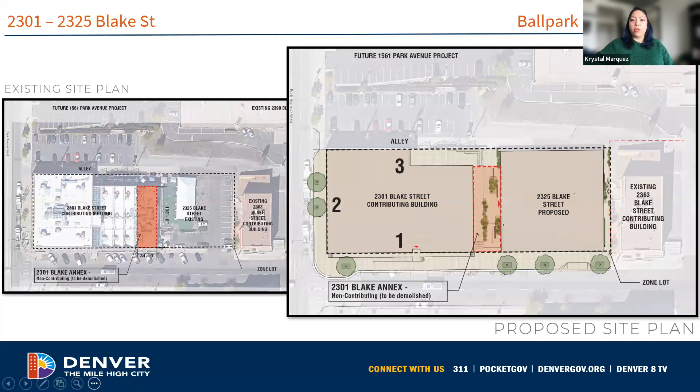2301 Blake Street is a contributing structure to the district. However, the proposed demolition of the later 1950 addition, outlined in red on the left at the parking lot area, is shown as non-contributing in the district map. So staff is supportive of the partial demolition of the non-contributing portion of the structure. On the right, you can see the new proposed site for 2325 Blake Street, where the arcade area will be cantilevered over the demolition area, and you can also see the footprint for 2325 Blake Street.

Here you can see the existing front facade for 2301 Blake Street with that later 1950 addition proposed for demolition on the right. On the bottom is the proposed elevation of 2301 Blake Street if the demolition of that addition is approved. The applicant has stated they plan to restore the newly exposed portion of the wall to the original as closely as possible, and that much of the interior wall remains, though no photos have been provided showing the current configuration. The applicant stated more detail would be provided in phase 2, the design details.

The removal of the non-contributing addition is proposed to make way for the new arcade at 2325 Blake Street. The new arcade will provide access to the rear alley and 1561 Park Avenue West, a property also being developed adjacent to the rear alley. However, that will be located outside the Ballpark Neighborhood Historic District boundaries, so we won't be seeing that, and no other demolition is proposed for 2301 Blake Street.

Here's the ground plan comparison for 2325 Blake Street. The new infill structure will align closely with the primary structure at the facade along Blake Street. The simple building form and massing is characteristic of the district. However, the overall height is not characteristic of the block. The new infill structure will be located between the primary structure at 30 feet tall and 2363 Blake Street, listed at 33 feet 6 inches tall.

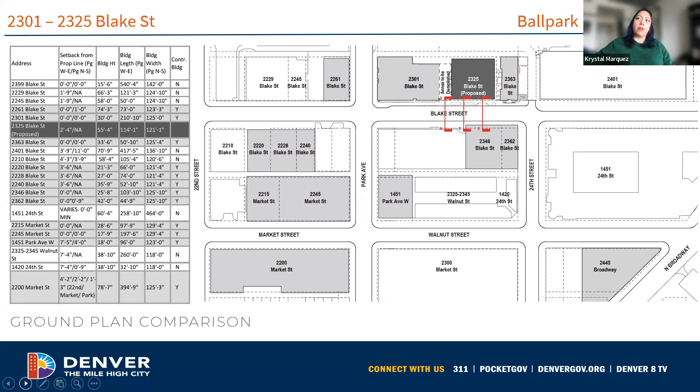The applicant has included heights of historic buildings in the surrounding context, such as 2261 Blake Street at 74 feet 3 inches tall, and 2362 Blake Street at 42 feet tall. Although these buildings are not located on the same block as the proposed structure, they are found within the adjacent context, and the proposed new infill structure would be between these heights, so it does appear height-wise contextual to the district.

Here you can see a street section at the arcade on the left, as well as the proposed first floor plan for the new structure at 2325 Blake Street. The main building entry is located at the interior part of the arcade, as seen on the right, and the height of the arcade shown is 25 feet tall, which does not seem to create an inviting pedestrian streetscape at Blake Street, due to the large height.

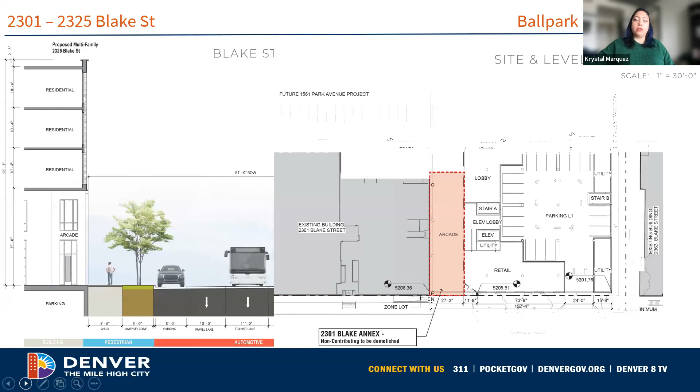The new infill structure utilizes the arcade for its main entrance, which is not typical of other structures in the surrounding context. There is no entrance directly into the new structure from the street, which is not typical of the district, as most other historic structures in the district have entries directly onto the street.

As you can see here, the primary structure appears like two joined buildings, since the second part of the structure is a later 1919 addition.

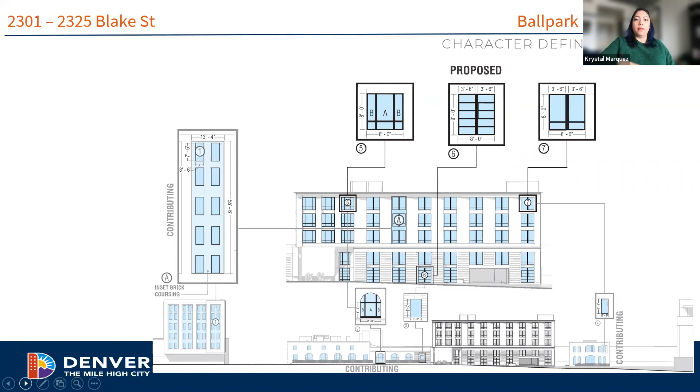The windows do not appear to be proportioned in size to human scale at the Blake Street facade. For instance, the windows at the base are taller and wider, 9 feet by 8 feet, than windows on the contributing structure, which is 8 feet by 5 feet. And the second floor windows on that first floor appear almost as 2-story windows, because they just have a trim piece between the first and second floor, so they appear much larger than they actually are.

Here's the Blake Street elevation for 2325. The new infill structure will include some typical features and rhythms found on historic structures within the district, like a base, middle, and top. The new infill structure uses contemporary vertically oriented window patterns that do not incorporate window openings at similar proportions to what's found in the historic district or on the contributing adjacent structure.

Some of the windows, particularly above the arcade on the front facade, do seem to take nods from the contributing structure, though the other windows on the facade do not appear to relate to other windows called out on that character defining features page.

The windows on the proposed infill structure emphasize a vertical nature with vertical mullions in 2 different patterns at the upper story, one pattern over the arcade area and another pattern over the rest of the structure.

Those upper story window patterns within the surrounding context typically have paired sash window patterns with some spacing between the paired windows. This can be found at 2261, 2363, and 2362 Blake Street. The upper story window patterns found on this proposed structure do not really match those patterns, and the upper story windows appear as one window rather than two paired windows, and are not a sash type of window, which would better match the historic character of the surrounding buildings.

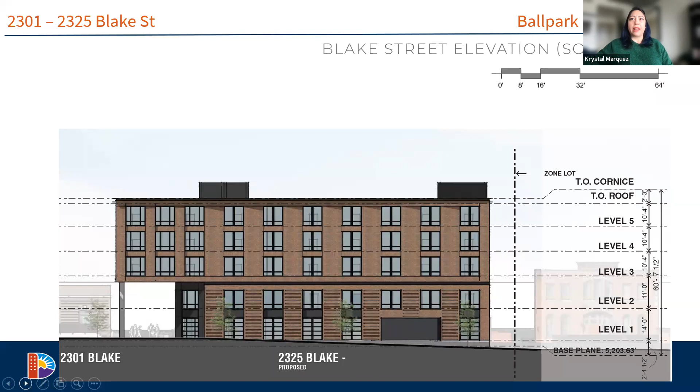The surface parking area in the building will also be accessed from the front facade on Blake Street as seen here, instead of on an alley. Access to the parking area should be moved to the rear of the building and be accessed from the alley, which would follow district patterns better.

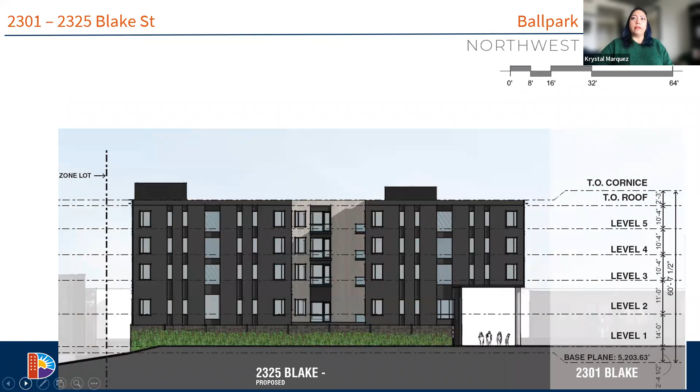Here you can see the rear elevation along the alley. The windows at the rear and side facades do not really appear to have any relation to the historic context, as they are very different from the front facade, and there are several different window styles. However, being at the side and rear elevations, there may be more flexibility for these windows.

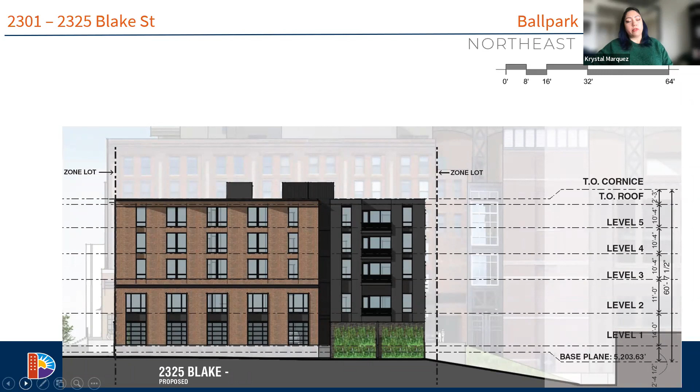2301 and 2325 Blake Street are located in the factory warehouse sub-area, according to the designation application for the Ballpark Historic District. Buildings are more horizontal in form, multi-storied, flat-roofed, completely cover the lot, and have a structural system of bays articulated on the facade using details such as pilasters, columns, and decorative brickwork. So staff has some concerns with how the new proposed infill relates to other contributing structures in the district, particularly in terms of window patterning and placement, as well as the verticality of the facade design and bay articulation. Therefore, staff is recommending denial at this time.

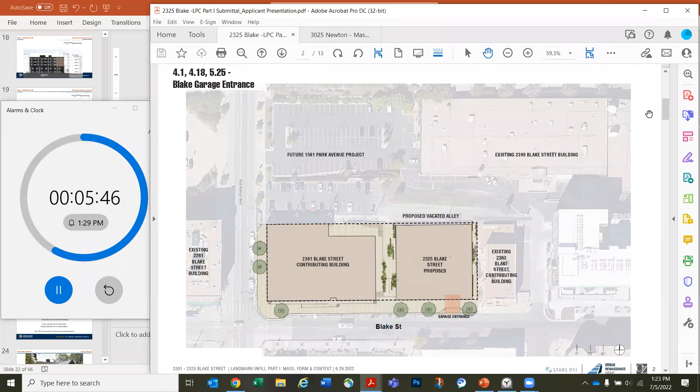There were a couple of staff comments on the position of the building in relation to the property line. We're proposing to hold it back just about 3 feet to allow a little more cushion to what will be a very, very tight pedestrian realm and right-of-way as a result of the proposed flow line from transportation. Right now it's kind of a no man's land with no curb, and this allows for a pedestrian realm. We thought that if we could back off about 3 feet, we could get a little more active space, and also outswinging doors that could potentially feed the retail along the frontage, which was mentioned. Wanted to point that out in this slide.

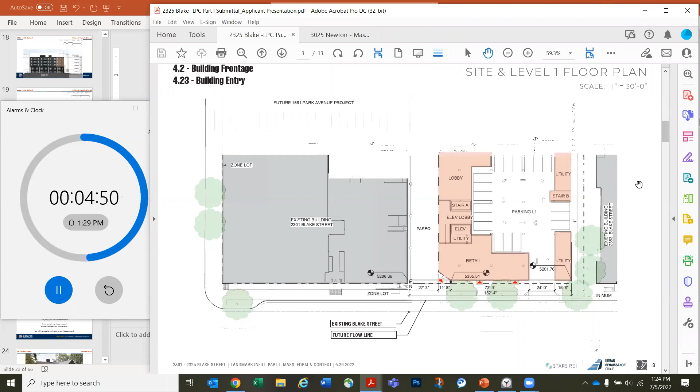If you go to the next one, thank you. This is just for reference, the frontage and the entry. We are proposing a chamfered entry, which you can see in and around the neighborhood, to highlight this pedestrian flow, this paseo or passageway, that would take us into this very vital and revitalized pedestrian vacated alley that will really be the nexus for the entire development.

Next, thank you. Here again were a number of precedents of that kind of chamfered corner treatment. These next few slides we'll go through quickly to clarify the height and how we're measuring it, which is now consistent at 58'3". As staff has mentioned, it does seem to be consistent with the heights in the district.

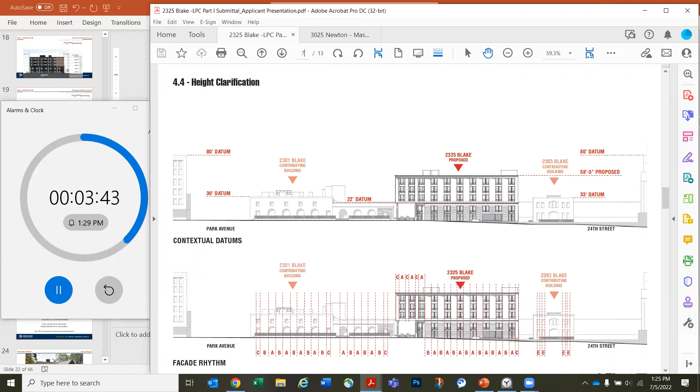Next, and these next few just use that 58'3" consistently. We were measuring it a couple different ways, and it's now consistently measured. These are just going around the whole building with that consistent 58'3".

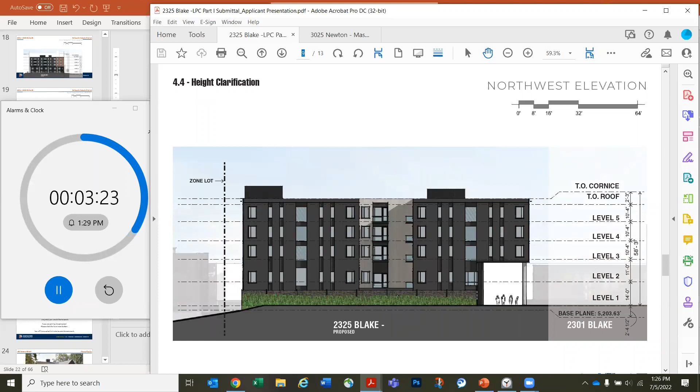Okay, and now this one — again, we really appreciate the feedback. This is more of a clarification, and we look forward to refining these based on the feedback as we come out of the mass, form and scale phase 1 and go into more of the detailed design. Not to say that doesn't matter, and right now again we appreciate the feedback.

Wanted to point out that the ground floor is where we're proposing a mullion pattern more consistent with the pedestrian scale, and also a nice water coursing taken off of the 2301 building that we're continuing across. So it's that horizontality that's intended to enhance the pedestrian scale.

Okay, and then you can see this — oh, I should be doing this. Sorry, I'm going to annotate just a second. I don't think it's allowing me to annotate. Anyway, you can see that horizontal striping of the existing historic building and how we're picking up from that and continuing it on the facade and the window mullions down low.

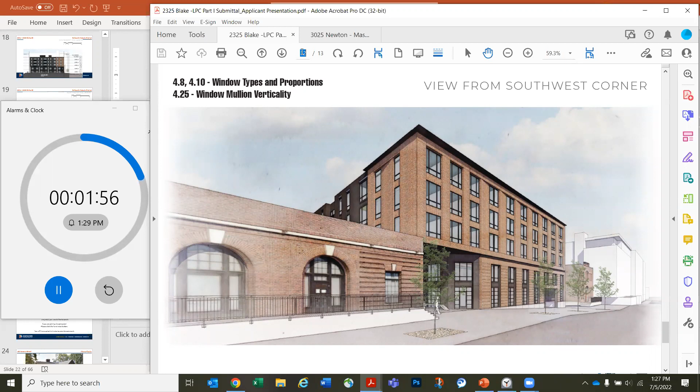This was just to clarify — even though staff has said our building width is consistent within the district, here we want to emphasize that we believe that's our opinion as well. Here are 3 local cases where it is rather consistent with the width of the buildings in the district. I think that concludes it, if you go one more.

So again, eager for your feedback and any questions. Thank you. Thank you, Rick.

Thank you, Pat. Commissioners, have you any questions for our applicants after their presentation? Okay, it doesn't look like it. We have no comments — you did such a great job that they don't have any questions for you.

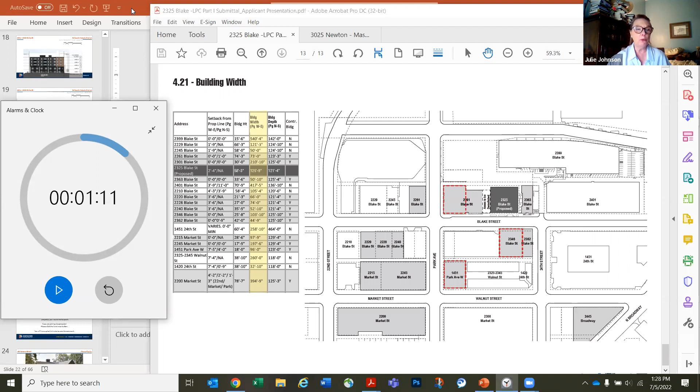Thanks, Rick. Thanks, Pat. So we will now, commissioners, do you have any questions before we go into deliberation? Have you any questions for the applicant? Oh no, we need to do public comment. Yep, sorry, I got ahead of myself.

Sorry, guys. Are there any people from the public that wish to make a comment, Jen? I don't see any hands raised, but if you would like to make any comment, please use the hand raise button at the bottom of your screen. I don't see anyone on the phone. Nobody on the phone, okay. No hands raised at the moment.

Okay, since there aren't any public comments, commissioners, have you any questions for the staff before we head into deliberation?

It does not look like it. Krystal, did you have any redirect, any further comment? Nope, I'm good. Great, thank you very much, Krystal.

Great job. Alright, commissioners, let's go into deliberation at this point now. What are you thinking? What are some of your initial thoughts? And keeping the guidelines in mind.

I think Krystal hit it very well as far as this proposed structure and its relation to the guidelines. What strikes me most of all is the garage entrance, because if you've ever tried to cross in front of one of those, you've got a pedestrian and safety issue. So they're widening the space to make it more pedestrian friendly, I think. And then you're going to have cars coming and going in and out of that spot. That's an accident waiting to happen, in my opinion.

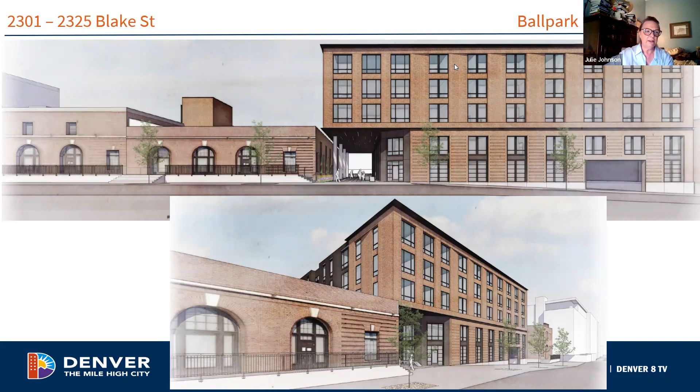George? Aye. Gary? Aye. Larry? Aye. Ann? Aye. And Julie also votes aye. So the motion passes, the project is denied, the application is denied.

Sorry about that. We are moving on to our next project for design review. It's 185 Corona Street, Alamo Placita. And it's Jessi. All right, so this is Jessi.

This is 185 Corona Street, constructed in 1945. This is a contributing building to the Alamo Placita Historic District. I would point out that the period of significance for this historic district is 1889 to 1942, so this by date of construction falls outside of that period of significance. But the designation for this historic district calls this building out specifically as a contributing structure, even though it is outside of that period of significance. So I did want to make that very clear at the beginning of this presentation.

So the applicant is requesting, additionally on this property, there is an addition off the back of the building that doesn't show up until the 1961 Sanborn map. The applicant is requesting to do window replacement of both historic and non-historic windows on the structure. Some of those windows are in that addition that I just pointed out.

There it goes. My mouse is being touchy today, so apologies in advance.

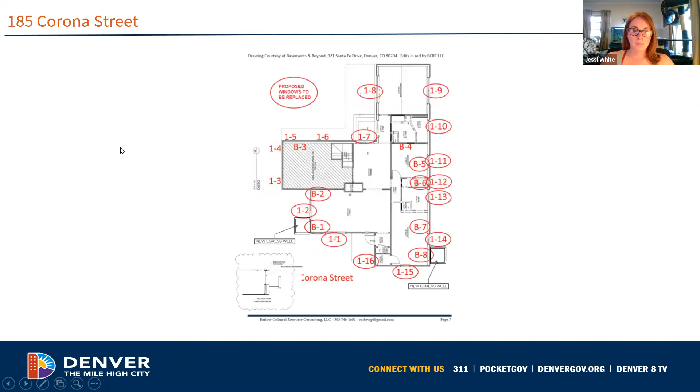Ten of the windows on that house are historic windows being requested for replacement, two of which are historic glass block windows. That's window 1-12 and window 1-16.

The applicant had the windows assessed by a window professional. The window conditions matrix shows several of the operator handles and movement mechanisms as a 3, meaning advanced deterioration. Staff wanted to reach out to that window assessor to get more information on that deterioration level.

The assessor stated that all the historic windows exhibit conditions typical of steel casement windows of this era, including failing glazing putty, failing exterior sealants, operational issues associated with overpainting and caulking and sealing, and broken crank hardware. He assured staff these are all in repairable, easily repairable condition. The crank mechanisms being the major reason for that 3 category can be easily replaced.

Of the 8 non-historic windows proposed for replacement, 3 are in the 1961 rear addition and 4 are at the basement level. Here are images of all of those windows, which are called out specifically in the window assessment as non-historic.

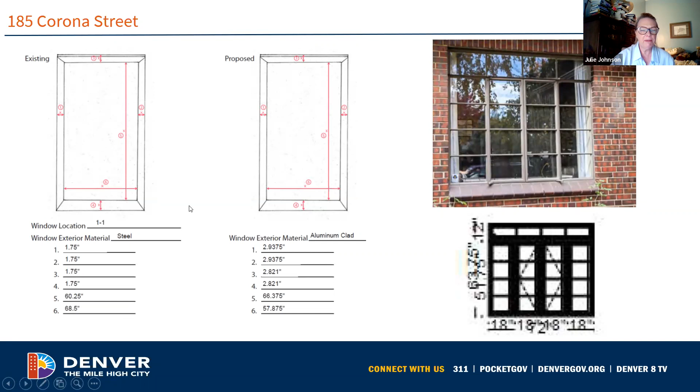All righty, can we get the applicants to join our group? Hi, it looks like we've got an applicant. The applicant's here, but it looks like you're muted. Hello, can you hear us? Yes, we can hear you now.

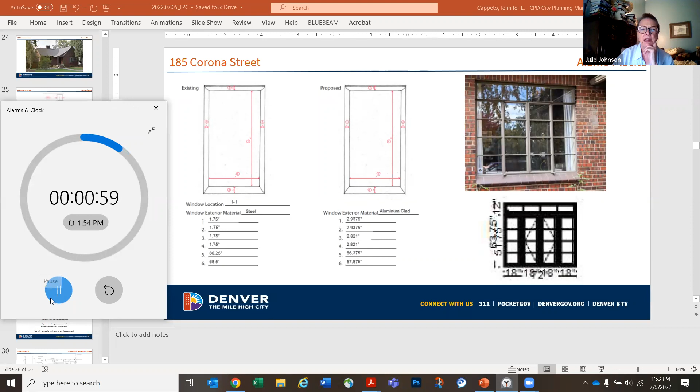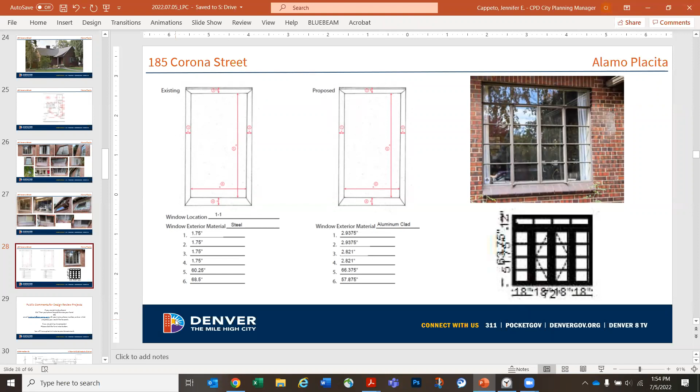If that's all from the applicants, commissioners, do you have any questions? Gary: This might sound like an impertinent question, but what is the heating system in this house? Is it hot water or steam, or is it forced air? Zeb, did you want to answer that? Forced air. Okay, thank you.

Any other questions, commissioners? It doesn't look like it. Thank you very much, applicants. Jen, are there any public comments if there are any? Is there anybody that would like to make a public comment? Please let us know now, use the hand raise function. I don't see anyone with their hands raised. There's one person on the phone. If you are joining by phone, press star nine on your phone. And they have not done so. Okay, great.

Commissioners, do you have any questions for Jessi before we go into deliberation? Anne: I have a question. This is, as I understand it, a contributing house, is that correct? Correct. And for this, though it's not in our purview, are tax credits available for the repair of the windows? Correct.

Thank you. I was going to follow up with a quick rebuttal. I really appreciate, Casey, you watching the video on my presentation for historic window repair. I would highly recommend repair rather than replacement. A lot of times whenever these windows are properly repaired and maintained over time, that will increase energy efficiency. You can replace defunct or dysfunctional single pane glazing. I know you'd have to put single pane glazing back in these openings as it is a steel casement window, but the repair of the windows alone will greatly improve your energy efficiency and sound efficiency, as well as having modern interior or exterior storms for these windows would help increase the energy efficiency and soundproofing even more while maintaining the historic windows.

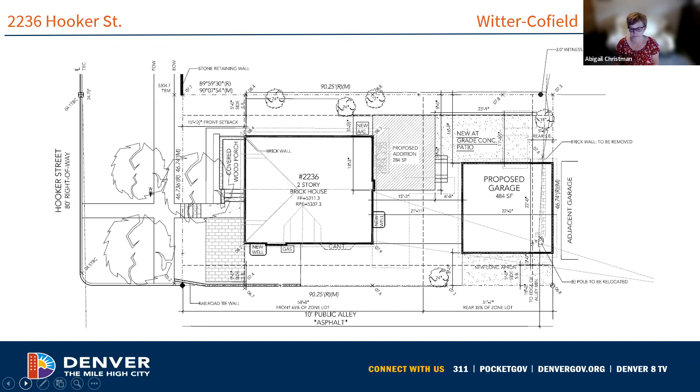So the addition will feature a simple front gable roof and will be clad in horizontal siding with shingles at the gable ends to tie into the shingles found on the historic residence.

So staff's only concern really with the design of the addition is this window that you see here facing the street. There are no other windows with the same proposed multi-light configuration on this addition. There aren't any other multi-light windows like this on the house. So we don't find the use of a multi-light window here to be appropriate.

We generally ask also that additions be simplified, so adding something that's more complex than any of the windows found in the house does not appear to meet the guidelines. So staff would recommend that instead this window be replaced with a simple 1/1 sash window that would fit better with the other windows on the house and be simpler for use on the addition.

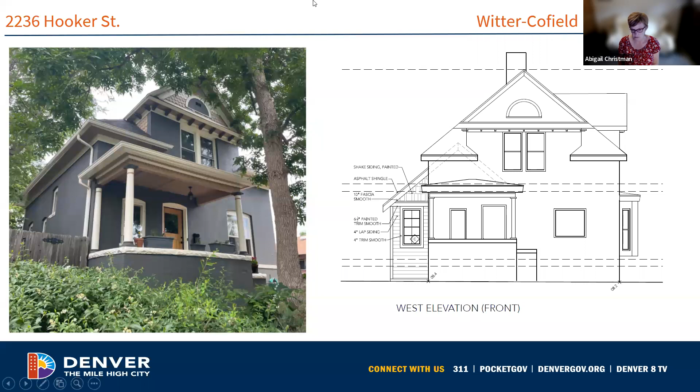The openings on this side elevation do have some public visibility from the sidewalk. And the window to be enclosed does feature a rusticated stone sill and a brick arch. Staff finds that that window does contribute to the historic character of the house.

Staff are concerned with the cumulative impact of the multiple alterations occurring on this elevation, with both the infill of the door and the infill of the window, and then the new window. So staff would recommend reducing the changes here, maybe just infilling the door but keeping the window, and adjusting that.

So staff would recommend that the proposed window infill and creation of a new window opening be removed from the proposal. This would be based on guideline 2.14, to maintain the pattern and proportion of historic window openings.

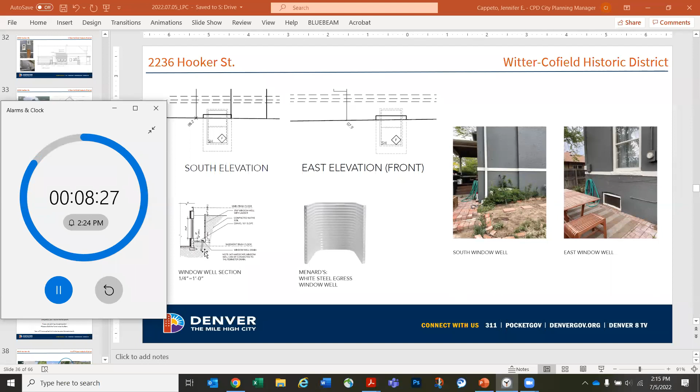The window wells, we will gladly switch these over to a concrete or brick base and change those details. The window on the north side facing the main street, we will gladly change this over as well to a 1/1 sash. I do have one comment, and I am not sure if it's something we can propose or not with the infill window. Is there any possibility, and you guys can tell me if this is a possibility or not right away, that the window that's being infilled can be infilled, but have the brick sill and arch over top convert over to the new window? The reason I say this is because in the plans, which were not shown on the presentation, the kitchen is behind that, and we would lose significant upper cabinet space if we have to keep this window as is. But we understand if this isn't a possibility, we can figure out how to make it work.

Nothing was really mentioned at all involving siding. We just want to reiterate that the lap siding is to mimic the brick. We are keeping with the fish scale on the gable roof, kept to the same design. We wanted to make sure the addition was also secondary to the house. With that, it's pretty simple for us. Abigail does a great job. Thank you.

Thank you very much. I do have just one question for you. Could you, the infill window, could you explain one more time what it is that you're asking? Yes, it crossed my mind when Abigail was going over hers when she was showing the picture of that side of the house. One down from the cursor.

On this elevation on the right here, the windows are fairly similar in size. If there's any possibility of using that brick sill or stone sill and the brick above from the infill to mimic it, where the proposed window is transferring just to the left. If this is a possibility for the committee to discuss, I'd love to hear thoughts on it, to be able to infill that and mimic it with that sill. I understand we'll still have to indent the brick if we infill, to recognize that there was a window there, but I'm curious about the possibility so we can have some cabinets on that wall on the inside. Okay, thank you for clarifying.

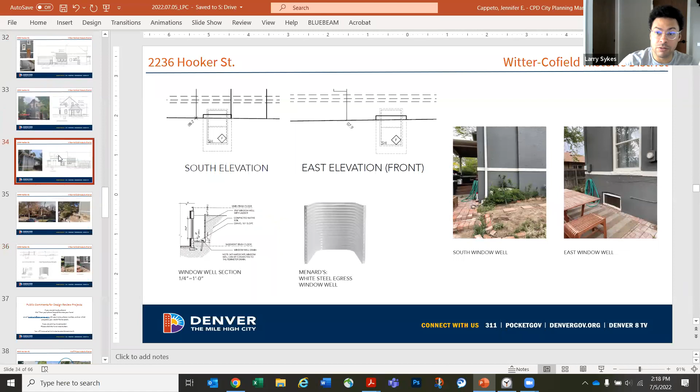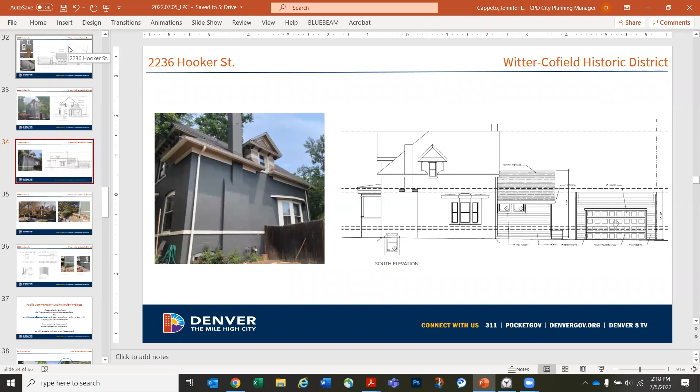Yes, could you retain the arches and still be able to meet egress requirements? Thank you, we will make sure to have that detail included in the conditional resubmittal to Abigail.

Thank you. Any other questions for the applicant? I'm not seeing any. Then we'll move on to find out if there are any public comments. If you're on the computer, use your hand raise function, let us know. I don't see any hands raised now. Okay great, thank you very much, Jen.

Commissioners, before we go into deliberation, do you have any other questions for Abigail? No? Okay great, thank you very much. Then let us go into deliberation, commissioners.

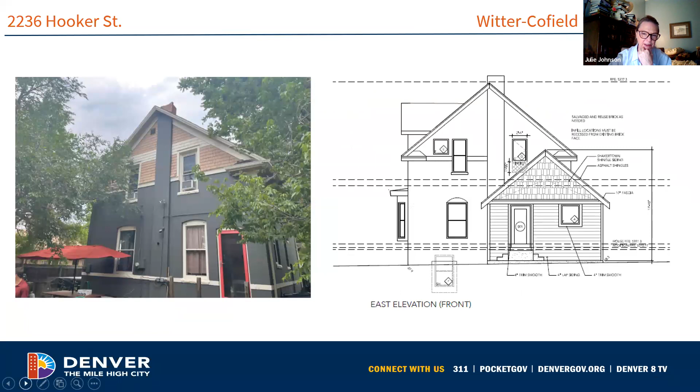What does everybody think? Maybe we could discuss the question he asked about the infill window he'd like to use, to move the sill and the stone. What's everybody thinking? I think kitchen cabinets are a quality of life issue. I would be fine if you want to move the window opening over and recognize on the exterior where the window had been.

Gary, I'd like to partially agree with what George is saying. I would agree with infilling the window, but leaving the existing original sill and head details there as historic evidence of the window. But to do that, I would oppose adding a new window. I think the new window is being added because there's a sink there. Well, the kitchen arrangement could be altered so the sink can go under the existing window further over. I know that might interfere with the perfect triangle, but I don't think that's too large a sacrifice to make in order to retain as much of the original exterior as possible.

What does everybody else think about that? Anne, I completely agree with Gary. Okay, short and sweet. I love it. Larry? Likewise.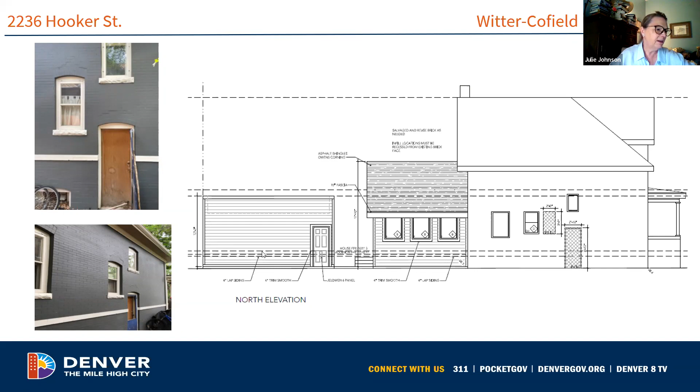Thank you very much to the applicant and to Abby. On to our next one, which is also in Witter-Cofield, 3025 Newton Street. And Abby is up again. Just as a heads up, it's not that there was a typo on the first agenda—it's actually in the Wolff Place Historic District.

Never mind, okay great, thank you for clarifying. Is it still Abby? Yes. Okay Abby, thank you. So up next is a mass form and context review for a new single family infill residence. The blue circle shows you the location—that's the house that will be replaced, and it shows the streetscape where it's going to fit into the block. The existing residence was previously approved by the commission for demolition based on approval of a replacement plan, so this is following that process as the next step to move forward. And that's the one you had approved based on changes that made it non-contributing, determined earlier. Okay.

I can get this—there we go. Okay, so here is the proposed infill. It's 2 stories plus a basement with a mostly rectangular form. The proposed infill draws inspiration from foursquare residences within the Wolff Place Historic District. Features drawn from the district's foursquare buildings include the hipped roof with deep overhanging eaves, the hipped dormer centered on the facade, the full width porch with a hipped roof on the facade, the boxy form, and the side chimney. The applicant has worked extensively with staff on the development of a compatible infill design for this lot, exploring several design options before deciding that a simplified version of a foursquare was the best fit for their needs, the site, and district compatibility.

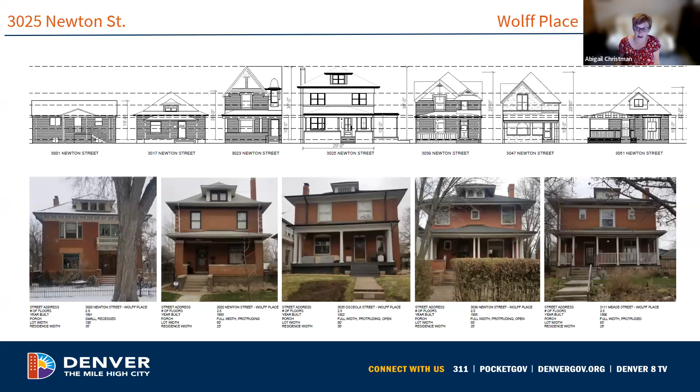Here you see the site plan. It's offset on the lot, pushed towards the south side, but this matches the same placement the existing house had, which is a kind of historic placement of the residence on the lot. There's also an existing garage that was just completed, previously approved by the commission, located at the rear of the lot.

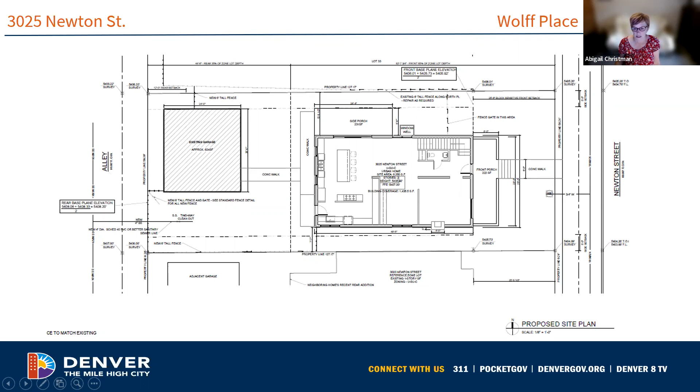Here you see the facade and the side. On the facade, the entrance is located off center, which is characteristic of other foursquares. On the side, it includes a side porch, a contemporary addition to the foursquare design, taking advantage of the side yard created by the double width lot.

This also looks back to the previous building. Due to its deteriorated condition, they needed to move forward with infill instead of the addition originally proposed and approved by the commission, which had also included a side porch on that large side yard.

That's a feature the applicant would really like to retain, still having that porch onto the side yard. Staff feels it's successful here because it's pushed back and adds a contemporary touch to what is otherwise a simplified version of a foursquare, with large doors onto the side yard.

Here you see the other side and rear.

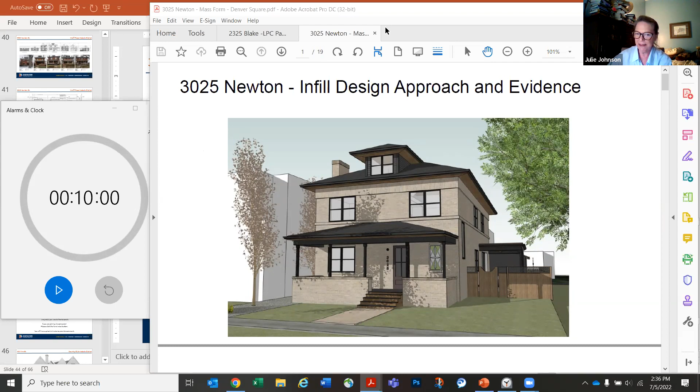Hi, this is Tom Hunt, and I'm the owner of the house with my wife, Margaret. Our permanent address is 3025 Newton. We're living at 3066 West 36th Avenue during this period. I'll let Nick and his associates introduce themselves real quick. This is Nick Young. I'm with Mod Architecture Plus Design, and we're the architects for the home for the Denver Infill.

Tom, if you want to fire it off, I'll then follow up with any architectural comment. Sure, thanks Commission for the time, and thanks Abby for all of the conversations about this. I think Abby gave a good snapshot over here.

We bought this place 6 years ago and had lived in it for 4 years. We attempted to do a remodel project for a while, got that approved, and then found some major issues with that, and then more historical research, and were able to come up and realize that the house should be considered non-contributing, and the commission approved that back in February.

So we've been working since then with Abby on some ideas and designs, and we ended up settling on the foursquare design, as she said, because there was quite a bit of evidence of it around the neighborhood, and it felt like the most straightforward way to achieve the commission's goals of having a very simplified version that did not detract from the existing historic structures, but yet also was an example of a historic style within the neighborhood. So I think Abby did a pretty good job of summarizing it.

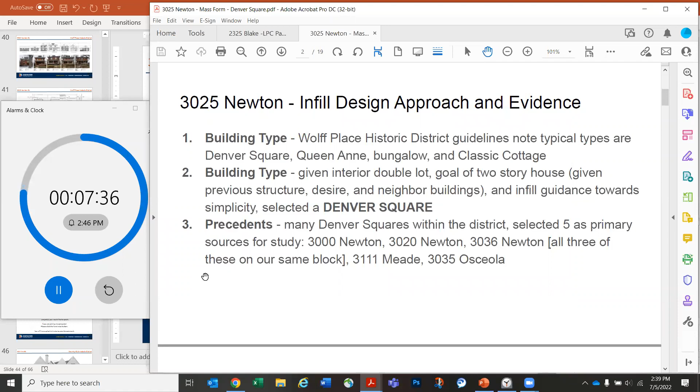If you wanted to, Jen, if you don't mind flipping forward, if you're the one controlling the slides, or Abby, I don't know who is. So I kind of mentioned this, and then go to the next slide if you don't mind. The precedents, the key things we took away.

Abby talked about the width, that was pretty clear. A couple other things that were really clear were the single dormers on the front, and then a full width porch that had an off-axis entrance. And then one other thing was there's frequently a detail window that was different than the other windows, on the door side of the bottom story. So we added that.

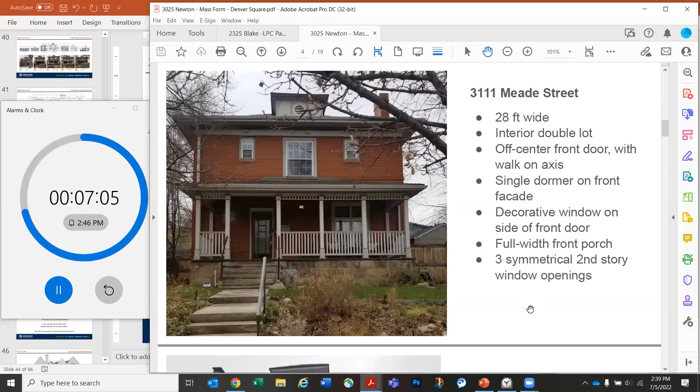Otherwise, I think the design is pretty straightforward, and happy to answer any questions if folks have any, but maybe I'll just pause there and see what questions folks have. We've got the full timeline at the end as well. Again, we'd appreciate any feedback or questions y'all have, and hopefully can move us forward, because we want to get back to living here as soon as we can. So thank you.

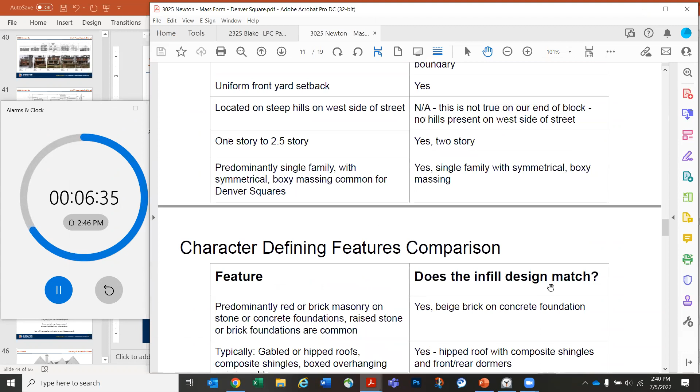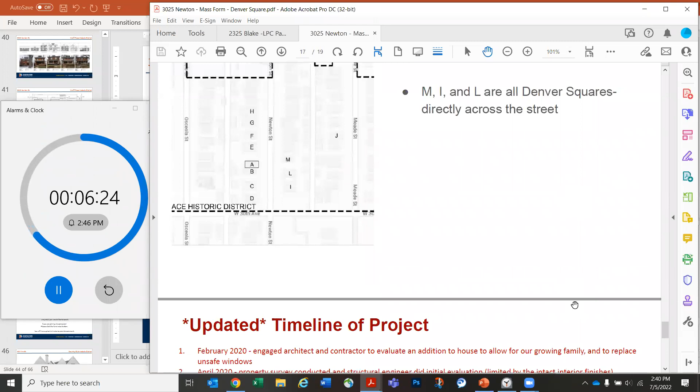This is Nick here again. To piggyback off Abby's presentation and then Tom's, a little bit more detail in regards to some architectural features. We collaborated with Abby, her staff, and the RNO. Those details included kind of skinnying up or narrowing our fireplace chimney stack. They're on the south side of the home. Also, we adjusted our proposed dormers, so the ridge lines were dropped from the overall ridge line of the home.

We then went into some nuances of the sizing location of the side porch and the width of the front porch. To piggyback off Abby in regards to the side porch comments, as she mentioned, we previously went in with an addition for the existing non-contributing home in the past, and we had a side porch approved. So it'd be nice if that sentiment holds for this design as well, because it'd be really great to activate the north side of this lot.

Tom and Margaret, their family enjoys gardening with their 3 daughters, so that kind of landscaping will be carried around to the north side of the home and the west side of the home. So other than that, I think we're looking for approval here, and I know this is just mass form and context. As Abby mentioned, a lot of effort's going to go into the detailing of this home with our recessed windows, our brick facades, the brick detailing itself and coursings. But today, for mass form and context, we're here to listen to staff's recommendation. Thank you.

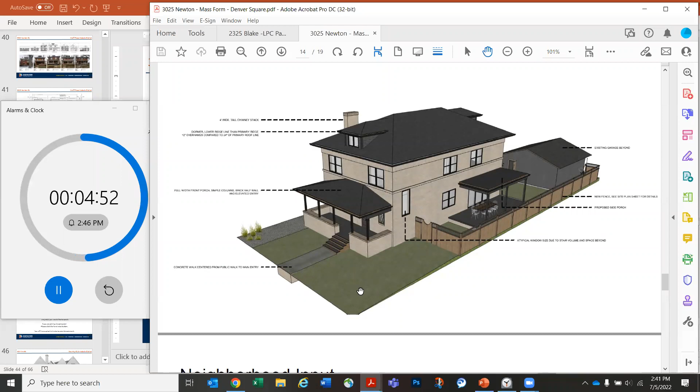Julie, it's my turn to say you're muted. Sorry, and my kitty is distracting me apparently.

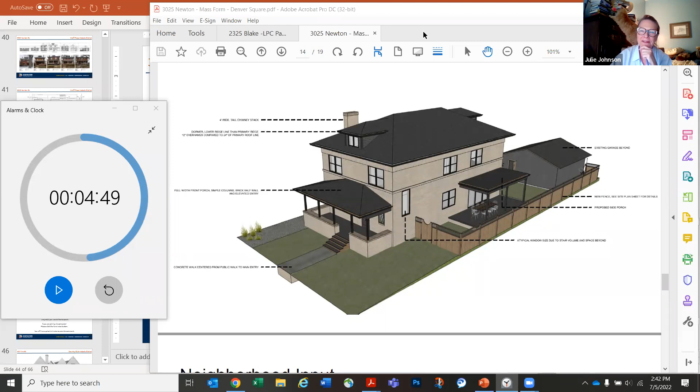Commissioners, does anyone have questions for our applicants? Let me see, all right, sorry about that. Okay, it doesn't look like we have any questions for you, Nick, or for Tom. Thank you very much for your presentation.

Then we will go on to see if there are any public comments. If you have your comment up, we do have someone who raised their hand. So Stuart, you are up.

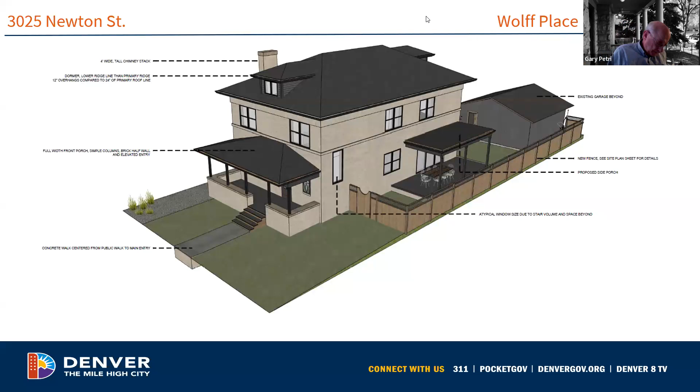Go ahead and have a vote then. George? Aye. Gary? Aye. Larry? Aye. Anne? Aye. And Julie also says aye.

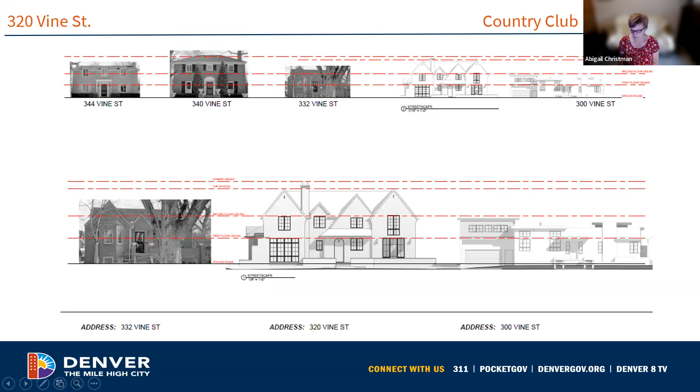Here is the proposed site plan, and you can see how it fits into the district. It has a more rambling plan, while the other adjacent properties have a bit more of a simple rectangular form, which is called out as being preferred in the Country Club design guidelines. However, as seen from the street, it's really primarily the front rectangular mass that is going to be most evident from the street.

The L that extends to the back and includes an attached garage is not going to be readily visible. The Country Club design guidelines do say they prefer detached garages, but attached garages are also found in the Country Club district. Since this one will be located at the rear on the alley and is not going to be readily visible, staff did not have concerns with it on this particular lot.

The lot is around 87 feet wide, and the proposed infill is around 67 feet wide. So the lot will not have the same sense of spaciousness that you see in much of the district.

So the FAR for the proposed development is 36.6%, which exceeds the recommended FAR of 30% that is presented in the district's design guidelines.

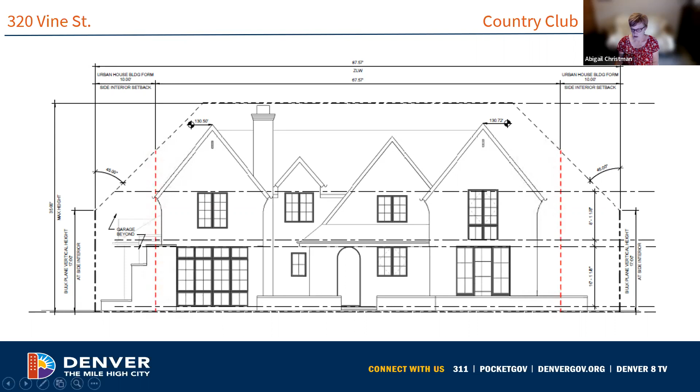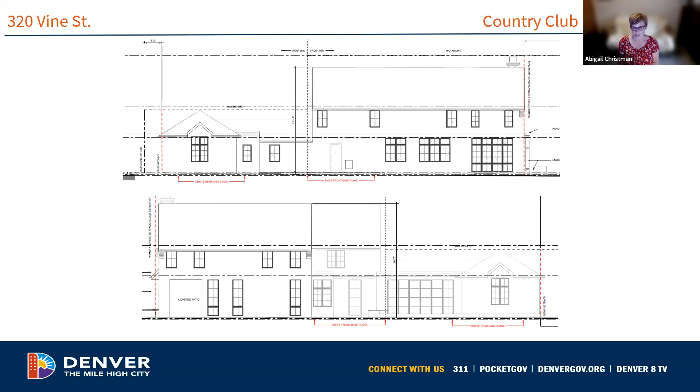So here you see the two side elevations. You can see the main two-story mass and then the single-story connector to the rear, and the single-story attached garage, as well as the variety of window patterns — some with the more typical height window, some with the taller windows, but again, not going to have as much visibility on the sides as the taller windows proposed on the facade.

So here you have the rear, showing that rear single-story garage that will face onto the alley.

So here, just a summary of the design. You can see here both of these recesses at the corner, creating a recessed front porch with that second story cantilevering over it.

So that's the primary concern of staff, along with the window heights. The Country Club Historic District Architecture Review Committee has submitted a letter of support for the project, though no details on the meeting were provided. Overall, the RNO said that they support this design. Their only concern is with the lot coverage, which exceeds the recommended FAR of 30% for the district. And you do have that letter in the packet.

So staff is recommending approval with conditions: that the height of the first floor facade window opening on the north and second floor facade window on the south align with the other facade windows, that the recessed porch at the southwest corner of the facade be removed, and that the first floor facade wall be brought forward to align with the second floor wall. Also, that an accurately scaled streetscape comparison be included in the application.

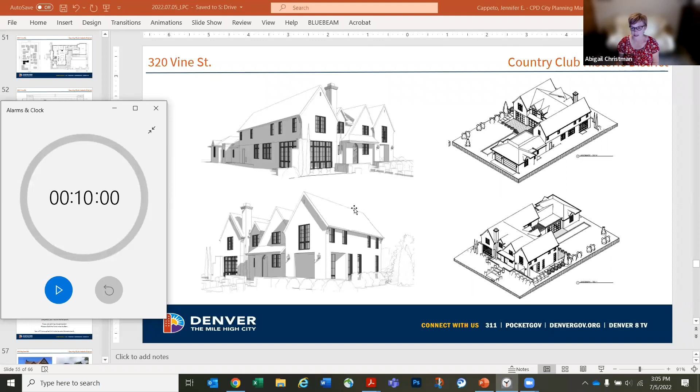So you think that your average person who would see this would recognize it as contemporary architecture? I mean, same thing as the last one we just approved—there's a line there, but I think with the mass, form, and context, and with the massing, and the fact that we're not reviewing details yet, it doesn't have a lot of the applied details.

We'll review details in the second phase, and that will be key, but currently it doesn't have a lot of the applied stick work, applied decoration, the kind of faux half-timbering and other decorative features. So to me it is a more simplified version. The pent roof at the porch references some pent roofs, but is different in design than you'd find on the original. So I find all those features clearly distinguishing it.

A lot of that will also depend on the design detail—things like color choices and material choices will really determine final compatibility. But overall, I think it would be contemporary, based on the pending design detail. Thank you, I appreciate it.

All right, commissioners, anybody else with a question for Abby? Okay, it doesn't look like it. Let's go on then and talk with our applicants, and it looks like they're up already. So you've got 10 minutes to give your presentation, and before you do so, please give us your name and address for the record.

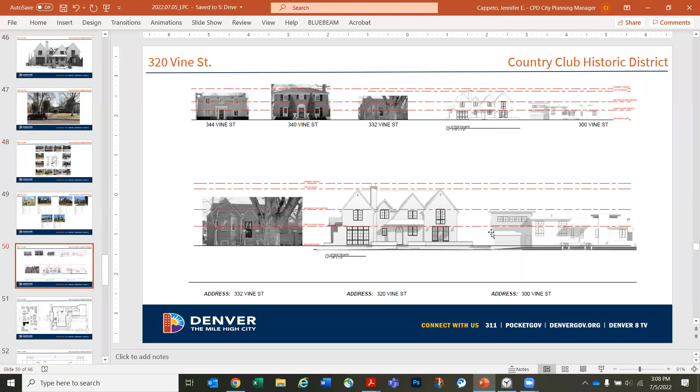If you don't mind navigating to the site plan: 320 Vine is situated on an 11,825 square foot lot with an 87-foot frontage. The other contributing homes to the north have roughly 50-foot frontages. This house has more than 10 feet of setback to the property line on either side and proposes an attached garage to the rear with alley access. The proposed building coverage, as Abby said, is roughly 36.6%, which is below the required 37.5% by the Denver zoning code, but above the neighborhood recommended 30%.

We acknowledge that due to the attached garage and associated program in the rear, our coverage is larger than recommended. We've studied removing program in the rear and were successfully able to reach that 30%, though the front facade remained the same and the experienced home from the neighborhood perspective was not affected. Therefore, we hope instead to push to keep the program in the back to accommodate our clients' needs and desired space. We do not intend for this to be a sneaky tactic, but rather just want to discuss some of our options.

As stated, the official period of significance for this neighborhood is 1902 to 1945. The original house was built at some point between 1951 and 1956, and since then there have been multiple alterations to the home, with the most recent being around March of 2002. We hope, therefore, that this home is determined to be non-contributing and that we may construct a home more fitting of the neighborhood.

This demolition application will be included in the next phase. I think I just made a clerical error and it did not make it to this one. If we don't mind navigating to the front facade.

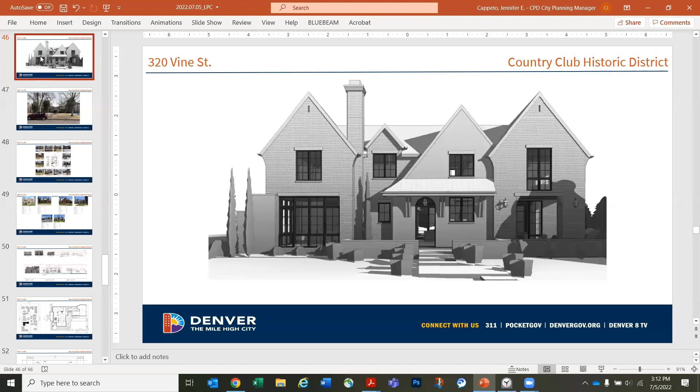In summary, we hope to construct this Tudor Revival style home to enhance the eclectic character of the Country Club neighborhood. We believe it is of appropriate scale and typology while still representing a house for today. I know Carlos has some additional comments on some of your concerns, and I'll let him take it away.

Thank you, Audrey. Can you all hear me? Yes, we can. Please give us your full name and address, please. Carlos Alvarez. My address is 141 South Broadway Street, Suite 200, Denver, Colorado, 80209.

Audrey did a wonderful job speaking for me because she does it way better than I do and much more clearly understood. I just want to add a couple of things in regards to the letter submitted from the HOA, the Country Club Historic District Architectural Review Committee.

They did have some additional supporting notes in which they say that although the proposed project does not have traditional window proportions as stated in the guidelines, the board does not object to their reinterpretation presented as a way of differentiating the new build from the surrounding historic homes. When we were working with Landmark staff, they had numerous comments for us that slowly, honestly made the project better, and it spoke more to the Tudor revival.

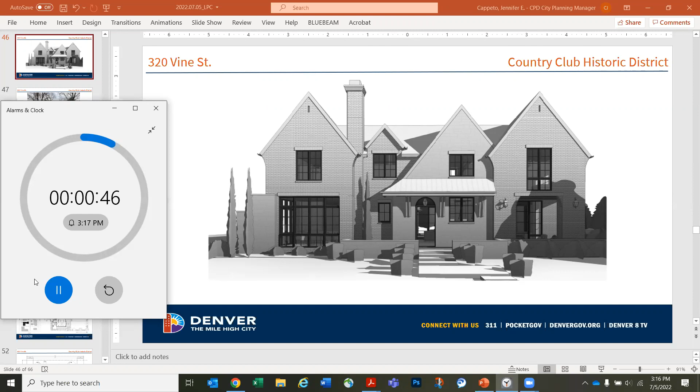I understand that while we meet the zoning guidelines, we're a little bit over the percentage coverage that the neighborhood recommends. Yet, like Audrey was saying, it's not visible from the street. So if we change the FAR, the front of the house would still look the same, because we would change it on the back. So those are the three items we were hoping you guys would approve, but we're prepared to change if need be. And with that, I think the FAR reduction, and she spoke of the graph that was somehow represented inappropriately, but those are my comments. Thank you so much.

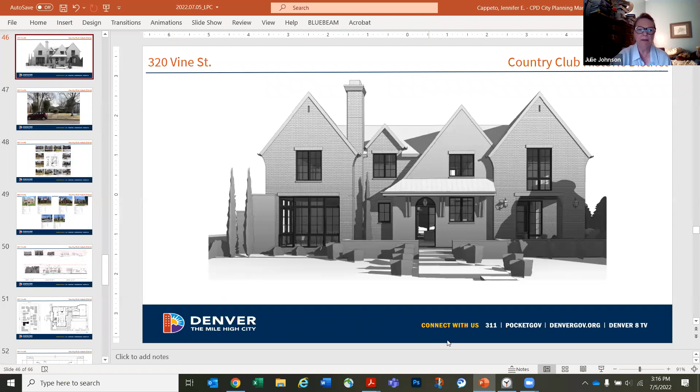Thank you very much. Thanks, Carlos, I appreciate that, and Audrey as well. Commissioners, have you any questions for our applicants? Nobody? Okay, all right, applicants, well done.

Thank you very much. Let's see, Jen, do we have any comments from the public? I don't see any hands raised. No hands raised, all righty. Okay, being as there are no comments from the public, commissioners, do you have any questions for Abby before we go into deliberation? Abby, do you have any comments before? No? Okay, great. All right, then let us go into deliberation.

Commissioners, what are your thoughts, Gary? Well, initially I was supportive of the staff's recommendations regarding the windows. But after Anne raised the question about what differentiates this from a traditional Tudor building, I'm thinking the front porch and the alteration of window sizes actually does that, and actually that the front facade reads modern because of...

...the larger window on the right side on the second floor and the floor-to-ceiling windows on the left side on the first floor, and the covered, I don't know if you'd really call that a porch, but it's a covered outdoor area. It's a porch, I guess. I think those things are what makes this building a modern interpretation, and kind of deals with that issue about false history. That's all I have to say, I think. I mean, I was a little concerned about all the gables in the front, but I guess I'm getting more comfortable with that.

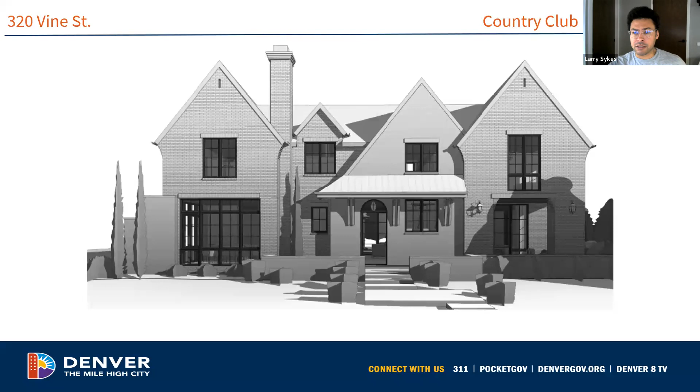Okay. Yeah, Larry, thank you.

So it sounds like we're kind of reaching an agreement here, but whoever would like to make the motion — it sounds to me, and I agree with Ann and Gary on this as well, about the windows on the lower left and upper right. So it looks to me, if I'm reading it properly, that the first two conditions would be removed, and then we would just ask for an accurately scaled streetscape comparison, if I'm reading that correctly. So do I hear a motion?

Gary? Well, Madam Chair, I'm ready to make a motion, but I have a question. Given that the motion will eliminate the first two proposed conditions, I'm wondering if guideline 4.8 and 4.16 are still relevant enough to leave in the motion. I kind of think they are, but I'm willing to listen to other opinions. 4.8 is about windows, proportions, and alignment, and 4.16 is about that porch on the southwest corner.

Right, I think maybe leave 4.8 on the windows, but strike 4.16. I would agree with that, Gary. Okay, good. Okay, Madam Chair.

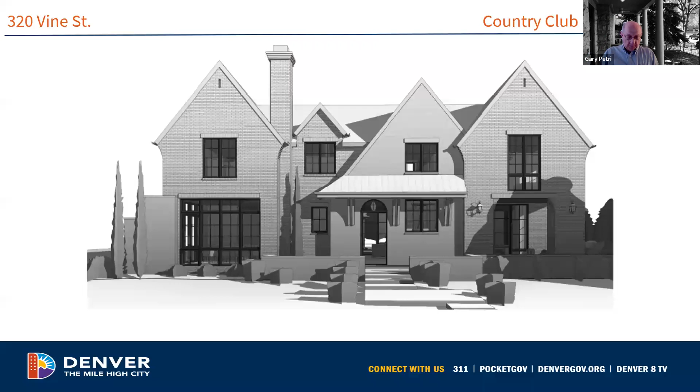All right, let's take a vote then. George, aye. Gary, aye. Larry, aye. Anne, aye. And Julie also votes aye. So the application was conditionally approved. Thank you very much to the applicants and to the staff.

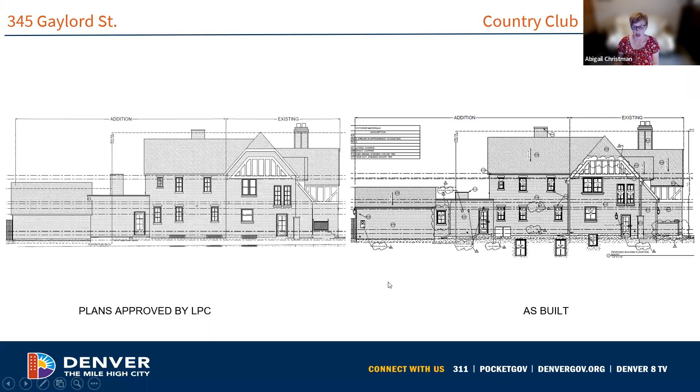Here's the other side. Again, you can see some changes to fenestration, and they also added these two AC units on the side.

It's adding a feature that did not exist historically, and it's enclosing and blocking off an entrance that was not blocked off before. We found that the brick stoop, though a simple entrance, was a character-defining element of the front porch. They've also changed the shape and configuration and widened it. Staff aren't as concerned with the widening as with the visible change of replacing brick with concrete and enclosing a feature that was not enclosed previously.

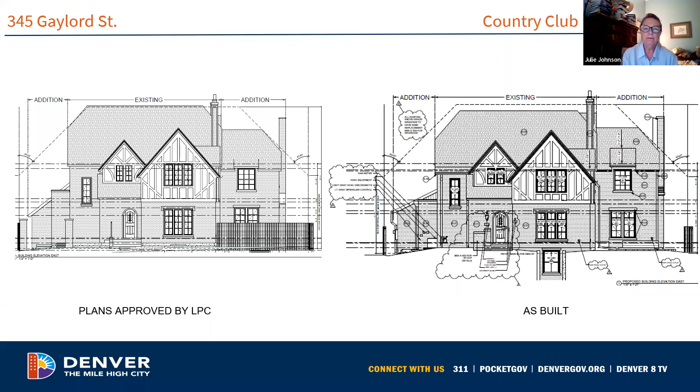I tried to figure out, it didn't show up in some of the other ones either. I'm also not sure exactly what happened there. So I think that's another question for the applicant to address. For sure.

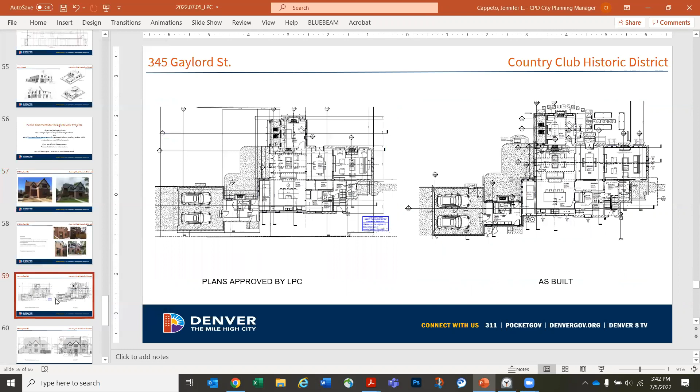And I'll speak first to that window well. The change there is that we did need to make that well deeper on our proposed plans, as I believe was approved, because it doesn't meet egress as it is. It was a short well, like you would find in an old building like that. So we had to expand it to 3 feet in order for it to meet egress. But keeping it low to the ground with the brickwork around it, I agree. I think it would look much better to have that in brick and in a flush well. So I agree with Abby's findings there.

And the garage that we saw in the back, the approved plans, I don't know how this got past the building department, but the approved plans were a zoning violation. We had it at 19 feet instead of 17, and so it needed to be shortened, which is why the pitch changed back there.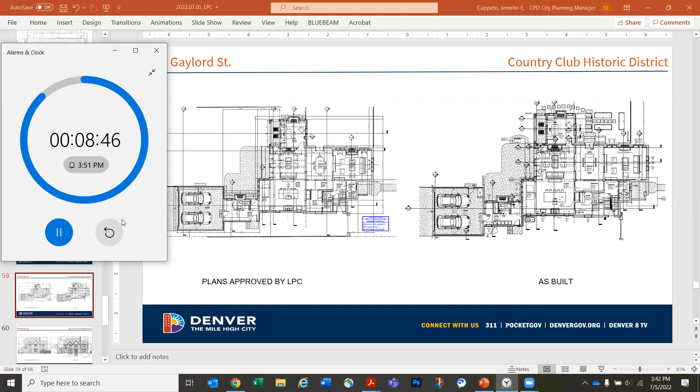And then as it relates to the front stoop, that was a construction scenario where I'm told there was a talk between the homeowner and our construction manager and discussions about whether it was original or not. There was actually a very cold joint where that patio met the house, as I recall, and it had somewhat of a negative grade on it. So they were complaining of it not draining properly and not being original. And there's not a lot of evidence to suggest that it was or was not.

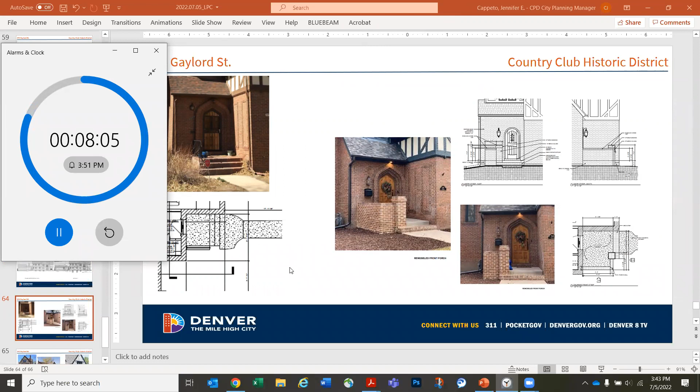We don't have any historic photos of the place, and so it was taken off during construction. And so I was tasked to design something to put in its place. And so that's what I came up with.

You know, I'd rather not take it off, but I understand Abigail's point. So that was one of those things — something was removed during construction that wasn't on the prints, and I was suddenly given a task of putting something there. Personally I kind of like it because it does create some privacy. There's thievery that goes on these days with things being left on the front porch. And it was very bald as it was there before, so I really don't know if it was original that way or not, but we have nothing to suggest otherwise.

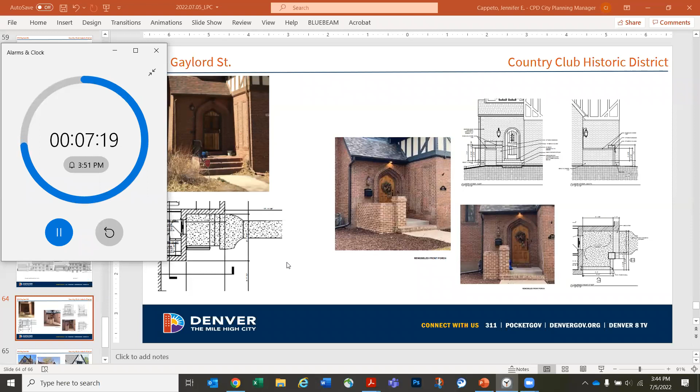So I'll leave that to staff's best recommendations and respond accordingly. And then on the window front, what you're seeing — the difference between the two on that original image — there were storm windows all over that building.

There was a slight skew, which is just different line work in those two different drawings from a change in software between when we generated one and the other. But behind that storm glass, in that smaller gable dormer above the front entry, there was a hodgepodge of stained glass in some window sashes and not others, and those windows had been greatly tampered with in ways you can't see behind the storm window.

The same is true on all of those windows - there's storm windows over them, and then what was behind them. In some cases the glass panes didn't match, so the homeowner produced a letter from the previous owner explaining how they had done replacements throughout the years on all of those windows, and we did the best we could to replace with a perfect match.

We left the spread molds and brick molding in the walls as original. It was a sash-only replacement that matched the pattern and divided light that was there before. So the historic context exists because you can see that thickened spread mold in that side image between those casement sash windows, and all of that was left in place and wasn't changed.

But the biggest difference you're seeing streetwise is that the storm glass is gone, which is something I typically encourage my clients to do because they look terrible. So that's how that all shook out.

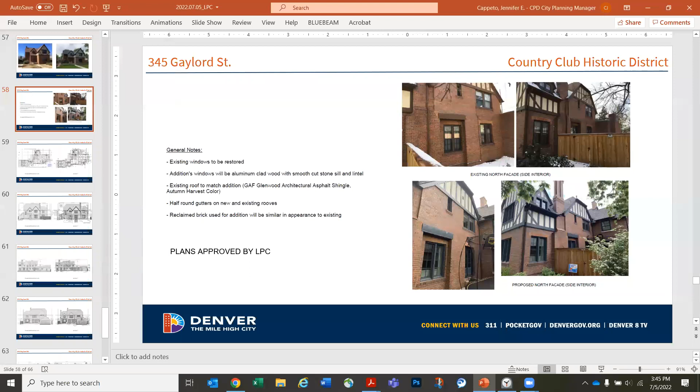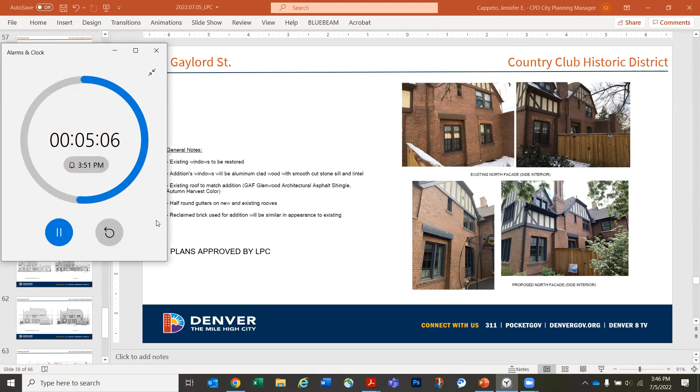And that's again why when the front porch was brought to my attention, it just didn't seem right - it seemed like the house would have had something better than that, though I don't know what it was. It was failing from a drainage perspective, but that was a site condition where demo crews, homeowners, and construction managers were there, and the front stoop, in its very minimal state - there wasn't much there - was removed in place of the new one. So that's the story of that project.

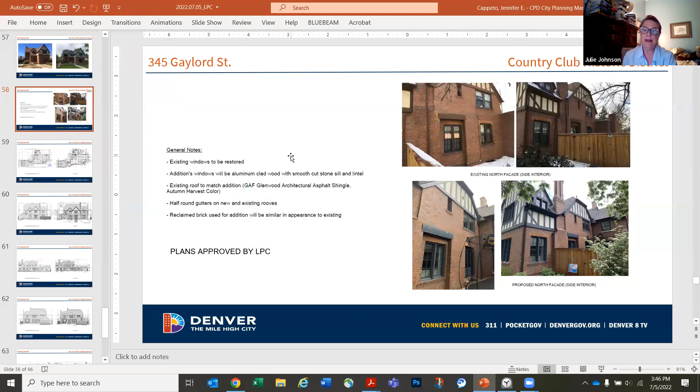Julie Johnson: I have a question. Can you pull up the photos again? Was a chimney eliminated?

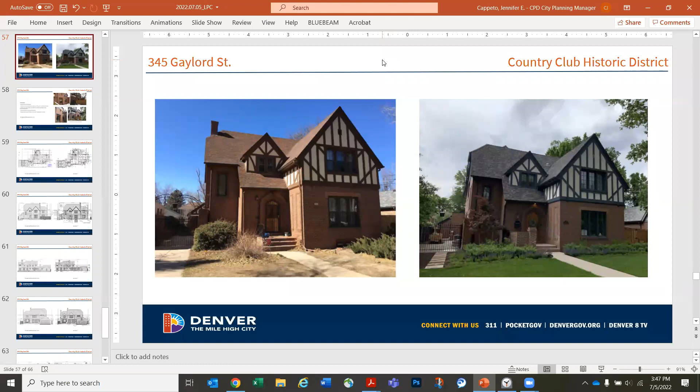Yeah, you can obviously see that there is one on that left side. There was an old coal chute there, but it doesn't appear that way now. I don't recall the process of that being eliminated, but that chimney wasn't for anything - I think it was a coal chute or something of that nature. And it doesn't appear to be there.

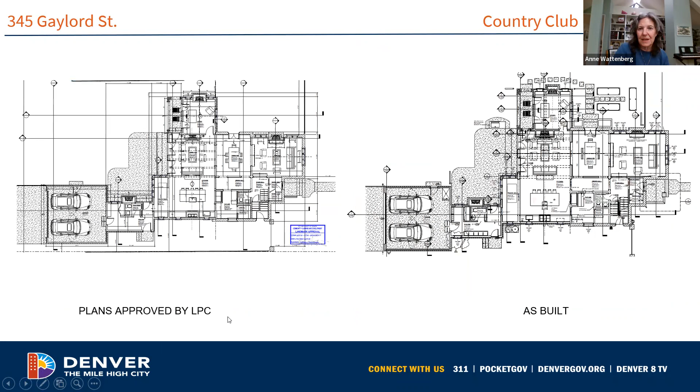But I completely support the staff's recommendation. And I think in particular, the problem with the front stoop is that it's the wrong brick. Maybe if it had been done well, and if that had actually matched - it doesn't even look like it matched the mortar or the coursing - maybe there would be a reason to look at it. But it seems to me it was done sort of poorly and doesn't respect the quality of brickwork you can see on the right hand, the original brickwork, at all.

So I support the staff's recommendation. I am curious because obviously the chimney was something we could see - what else ended up being changed in this that wasn't documented anyway? But having gone through this a few years ago, it's probably better just to do the best we can and stay with the staff's recommendations and try to get better documentation. Yeah, I noticed that the brick looked new as well.

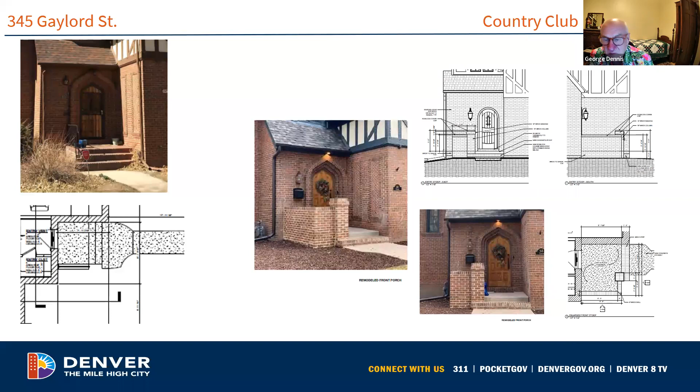I agree with that. Anne, what were you thinking? I agree. Okay, cool. George, did you have anything that you wanted to add? No, I think I will concur with Abby's conclusions, in that basically all within our purview that we can ask for - although absolutely detailed documentation on the windows and the site work and all of that should be required - but there's not much you can do to revise what's been done other than Abby's recommendations, and I think they should be.

All right, thank you George. So whoever makes the motion, number 1 is return the front stoop to its previous appearance. Perhaps we ought to, if we are agreed upon that, and it sure sounds like we are, note that the 2 risers is fine rather than the 3, just so that we're more specific, so they have the information that they need.

All righty, that said, do I hear a motion from the floor? I'll try it. George, go for it.

I move to conditionally approve application 2018-COA-00000097 for revisions to the previously approved COA at 345 Gaylord Street, as per design guidelines 2.4, 2.1, 2.12, 2.18, 2.19, and 2.34, documentation and information provided in the staff report, with the following conditions: return the front stoop to its previous appearance including 2 or 3 risers; reverse the egress wall - number 2 is revise the egress wall on the facade to be brick with a flush cover; and 3, provide complete documentation of the site work.